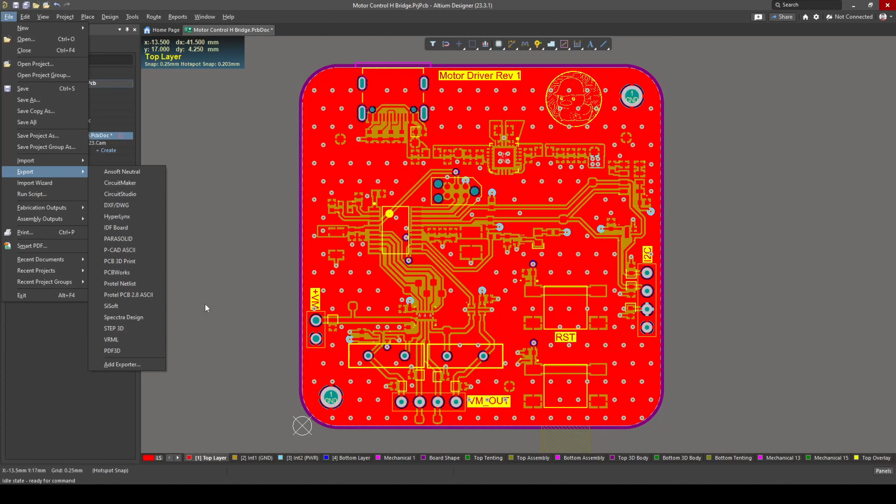Here we got the motor driver project that we recently completed maybe 1 or 2 months ago. In Altium you can export it to a STEP file, which will allow you to open this file in your CAD of choice. For mine, it'll be Fusion 360. To do this we go to File, Export, and STEP 3D. This will be a similar process if you're using KiCad, Proteus, or any other electronic design tool.

Here in Fusion 360 I have loaded up my board and I can see the 3D model of it. I can also see the components of it, and this really solidifies the need for the 3D model and its components. You can see the size difference and see if your board is spot on and if you're happy with what it's doing. So these 3D models can really help me in building my board out.

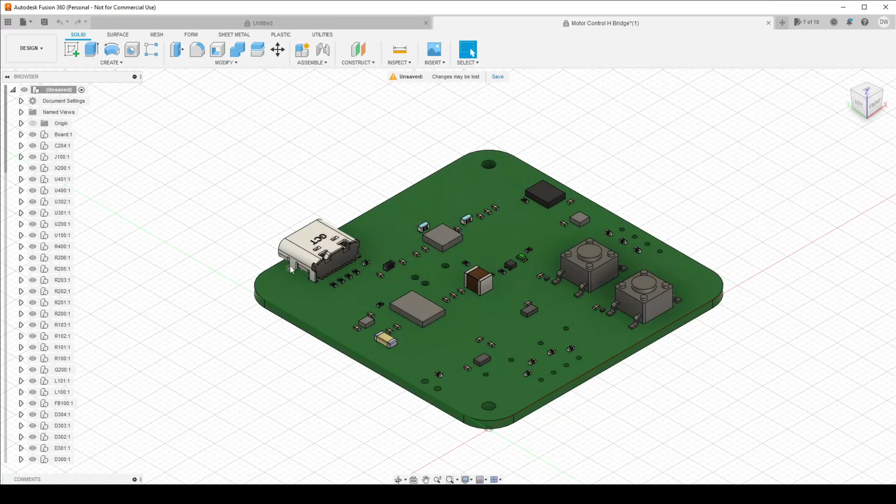I can see where the connector lies. Does it have a little lip? Can I get something in there where the buttons lie? Do I want a light tube on this LED? So now that we've got our board in here, I'm going to design this and see how easy it is.

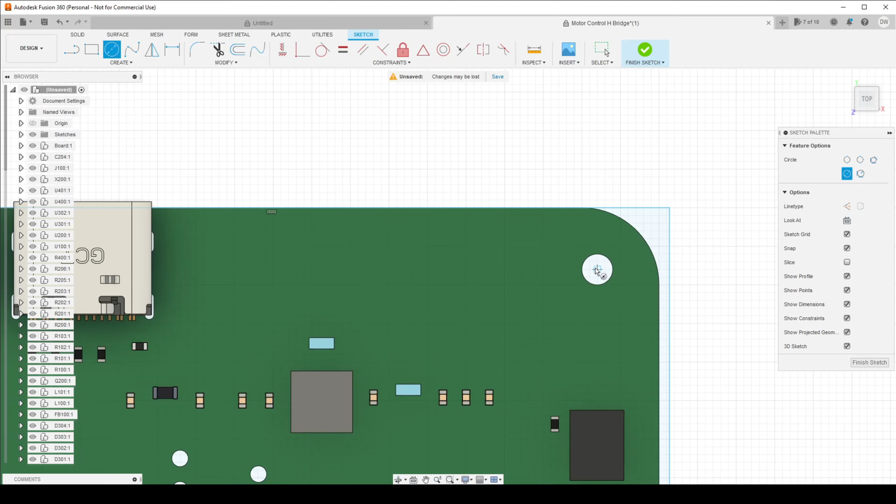As you can see here, I can directly line up with the mounting holes to ensure that I am 3D printing the right dimensions. But of course you can just set your mounting hole size to whatever it is to ensure that you're correct. Remember, there are some tolerances with 3D printing, so do keep that in mind.

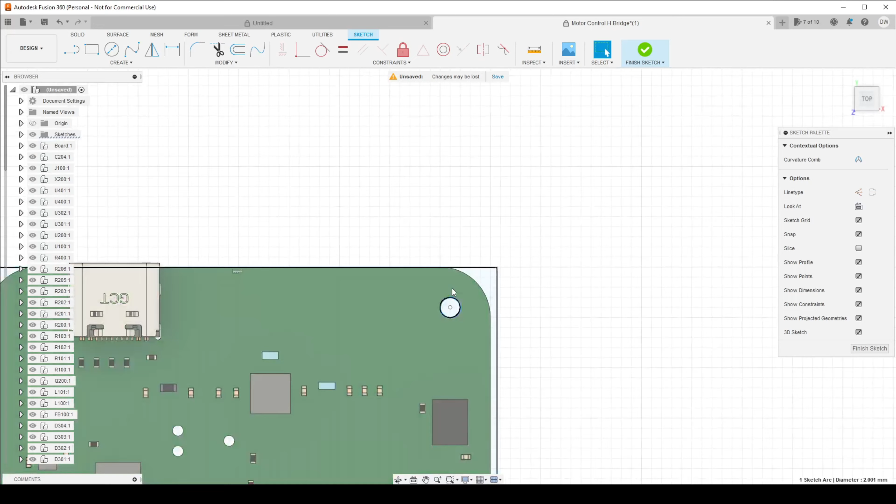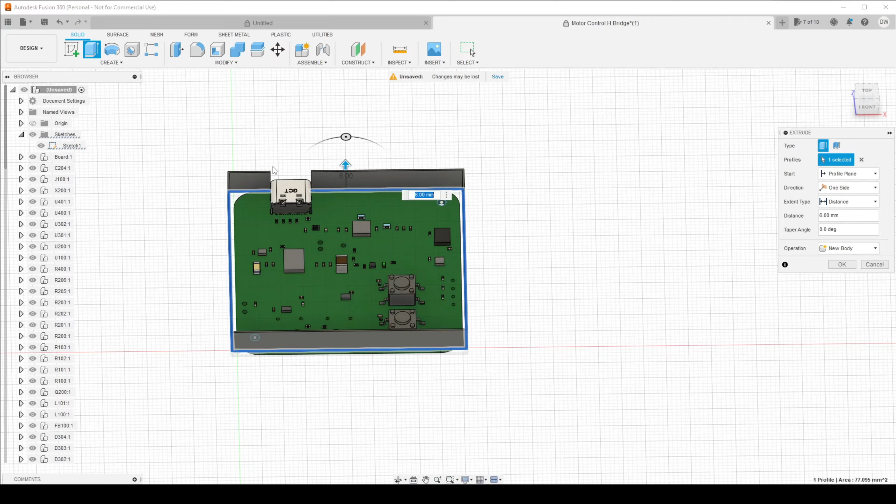When you do an extrusion, you've got to give a little bit of space for connectors to make sure the 3D models of the parts do not touch. Of course, these walls are way too thin for 3D printing. I would probably make them a bit thicker, but you should get the idea of what I'm going for here. And I'm just going to do some CAD, and enjoy the montage for what it is.

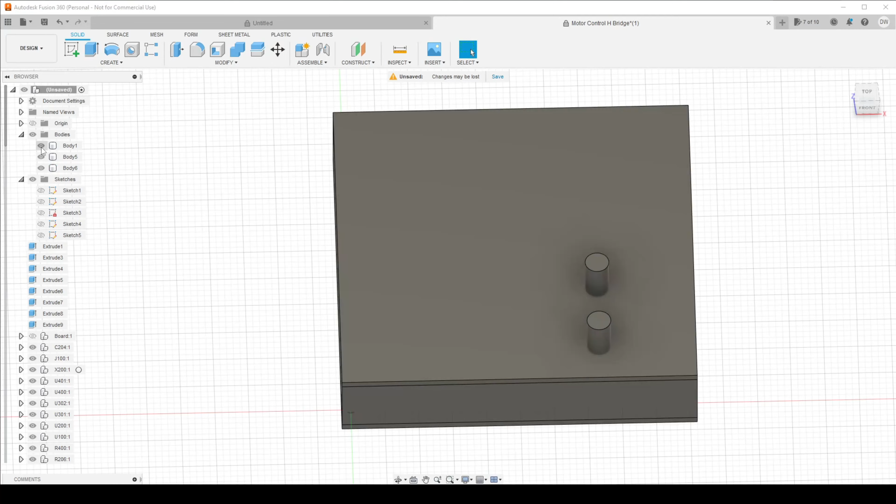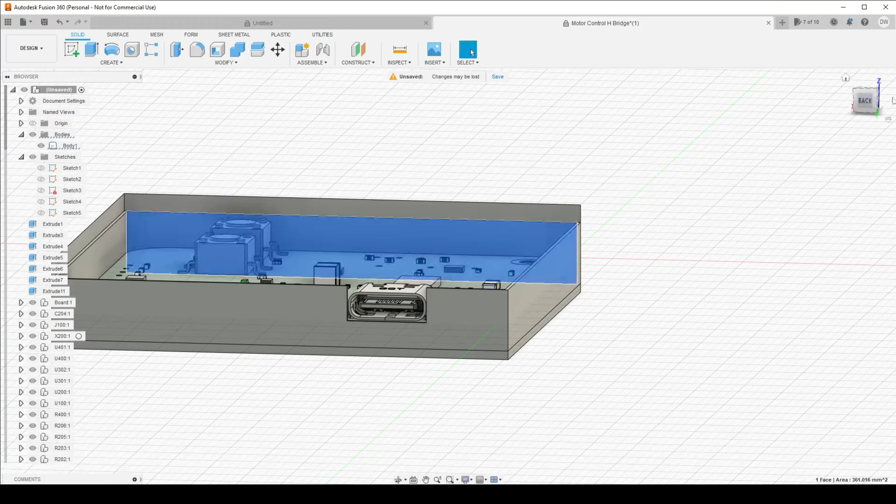So now you have access to your holes like that, and I've done all of this based on my 3D model. Of course this is not a perfect board enclosure by any means, but this illustrates what I'm trying to achieve by designing based on just the 3D model itself, the STEP file, and how you can easily draft up something like this and get it bang on without having to go through multiple iterations.

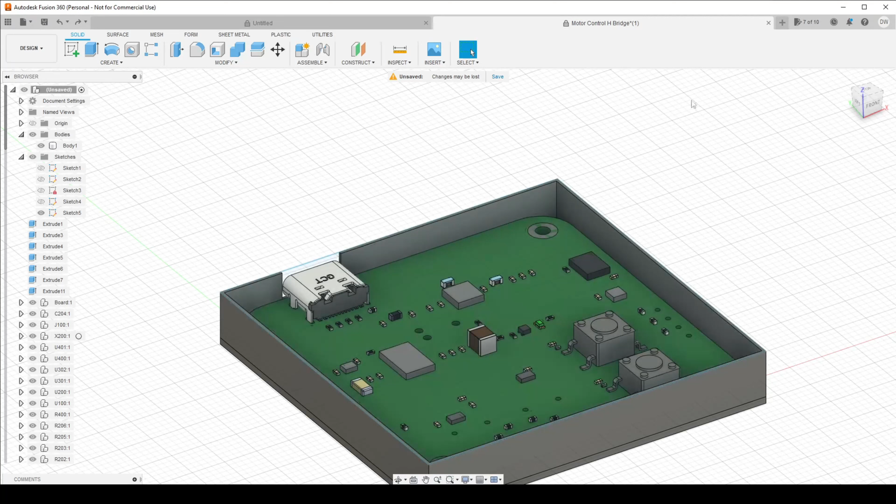Just remember that you've got to make it 2 separate prints. You may put a push fit or something into that, or whatever you choose to do. So I hope that was helpful in validating it. One thing you could also do is print off your enclosure on a piece of paper if you're still unsure. Print off your board and just lay them over top of each other to see if it fits.

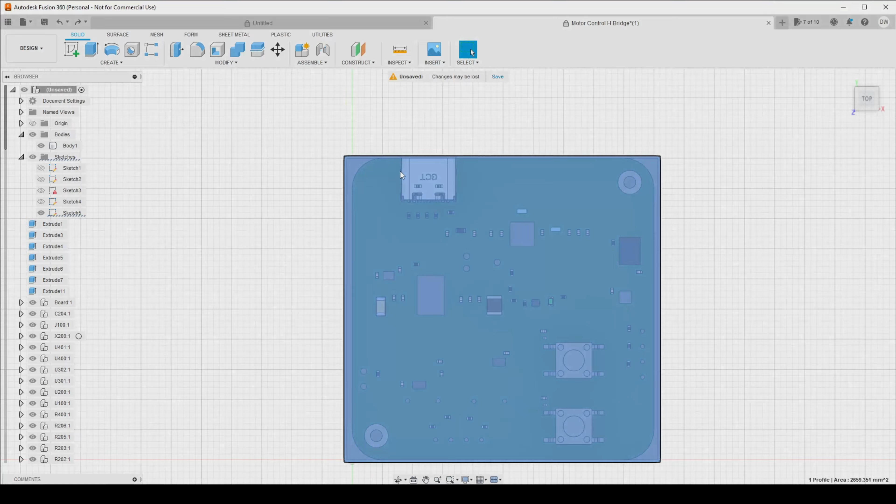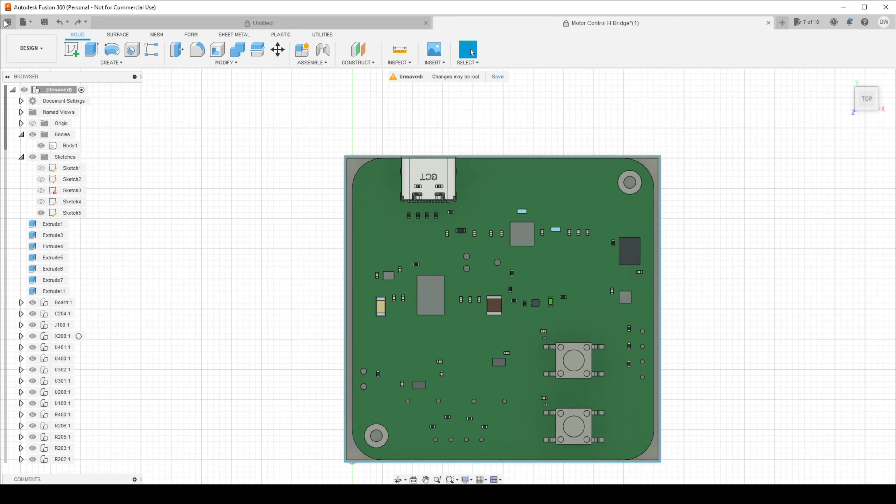With this file, you can play around with it. You can open up the lid. We can turn off different models and get a rough feel for it. We could even import our board into this and lay it right on top. We can see if the mounting holes that we've designed line up perfectly with it. This will help us avoid any mistakes.

I had a board once where I completely missed out the mounting holes. I completely got the dimensions wrong. Had I done this before, just imported it into the enclosure of my choice, I could have got it right the first time. Luckily, the design engineer was kind enough to 3D print me an enclosure, and everything turned out a-okay, except for my own idiocy. So I do highly recommend you do this. It's just so quick and easy to get the STEP file of your choice, import it, and test out your board.